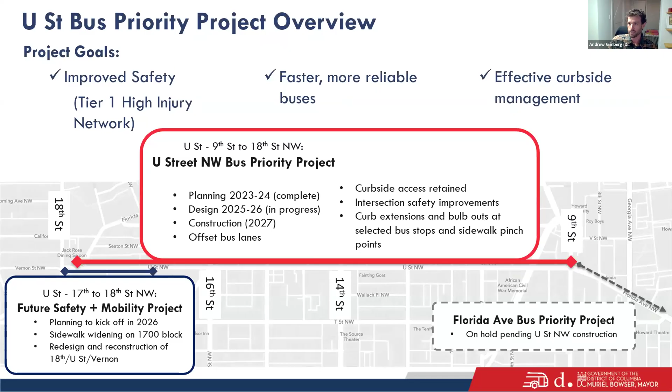So just a quick recap, we've done a lot of work on this project already. I'm not going to go through every single bullet point, these slides will be posted on our project website, most likely pretty early tomorrow. But we did a whole kickoff and needs assessment, with data collection and community engagement with all kinds of stakeholders, including this body. We went through concept development and selection, held a couple of public meetings, shared public concepts, and took a lot of feedback to refine those concepts.

ANC 1B did send a letter of support for the bus lane concept, so thank you for that engagement. We sent our concept selection letter in August of 2024. During 2025, we've had to sort out a few changes to the scope of this project, including figuring out that western end of the corridor, what we could do in this project versus what needs to be done as part of a bigger future project.

That was one of the key things we figured out regarding the scope of this project. We made a few tweaks to the overall design and have reinitiated the design work, so that's going full steam ahead and we're back on track. Right now we're issuing project updates. We're not reopening the goals of this project or the concept at large. However, of course, we're always open to hearing your thoughts and feedback.

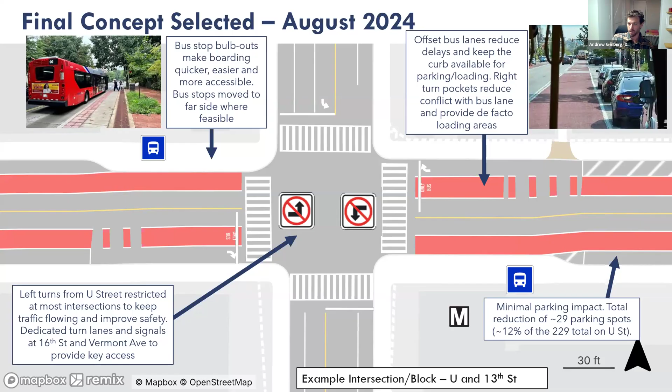A final flag: minimal parking impacts. Those numbers flagged at the bottom right are rough estimates—we'll get more precise as we move into the design phase. We do have to provide spaces for right turn pockets, a few lane shifts, and bus stop changes. Our initial tally is a slight reduction of around 29 parking spaces out of about 229, so about 12%. Those are estimates likely to change, but that's our initial estimate at the moment.

There have been a few changes to flag since we made that concept selection official. Some of it stems from action the DC Council took in the fiscal year 2025 budget. Led by Councilmember Nadeau, additional money was dedicated to this project and to DDOT to study and construct a few aspects along the corridor.

The first was sidewalk widening at the 1500 block, north side—that's the top image. It's a very narrow sidewalk pinch point, uncomfortable to walk along, and as part of this project we're going to address that. The area that's temporarily closed with curb, wheel stops, and flex posts where the slip lane was can be filled in and enclosed to make a much nicer pedestrian area, closed off with permanent materials like fresh concrete to make it nice, comfortable, and safe.

The second issue is the southbound slip lane, the diagonal lane onto New Hampshire Avenue from southbound 16th or westbound U Street. We observed a lot of high speed turning movements across that, really inhospitable to pedestrians and cyclists, and one of the more dangerous maneuvers on the corridor. So we did some initial traffic analysis to look at impacts and diversions that would result from closing it.

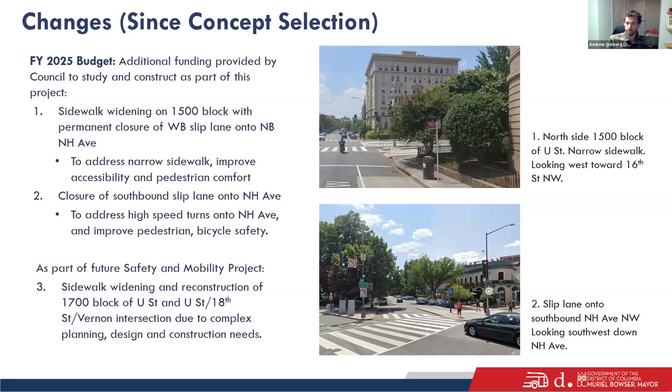In the northern part, there's a much expanded sidewalk area on that north side of the street, and this whole pedestrian area is going to be expanded and made much more comfortable.

One thing, in order to provide dedicated left turn signals and not create tons of bottleneck and delay for the buses, we are going to be eliminating the bike signal that currently allows bikes to do this diagonal movement from New Hampshire southbound. We're going to mark it, and we think this is a much safer maneuver anyway, because we noticed a lot of bikes just riding through the whole intersection diagonally.

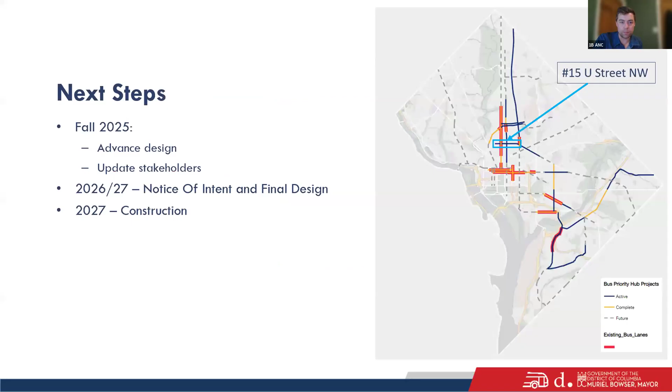Yeah, let's go back to that 16th and U slide. I also have a question about it. I'm very excited about the sidewalk widening at the pinch point on the northeast corner. I think that'll be great.

With the change to New Hampshire, will that still remain a one-way southbound street? Yes. Okay, so the only access is from U Street eastbound prior to 16th. Okay, cool. Yeah, I think people will be challenged by this idea, but I do think updating the geometry to be more like a regular intersection will have tremendous safety benefits. Crossing here is one of the worst places to cross in the corridor, so I think it's great that you guys are trying to figure that out.

Okay, Karen? Hi Andrew, I like the improvements, they're nice. I'm just curious to see exactly how closing off New Hampshire Avenue, which I frequently see used by our emergency vehicles, is going to work, especially with the fire engines that use that as a way through, and the accessibility for any of the residents that live along that street to have their emergency care.

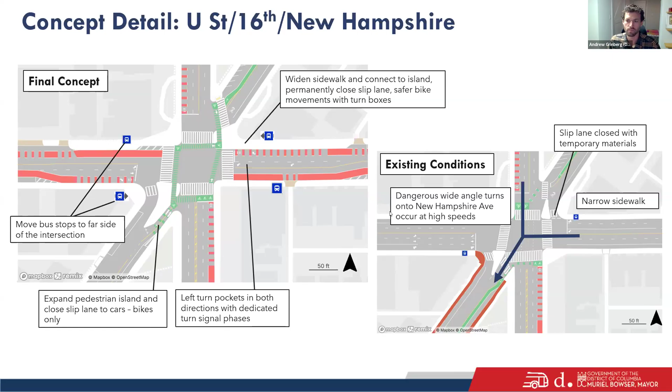Okay, good questions, everyone. So next, we're going to go to the streetery resolution. I sent this around, hopefully some people got a chance to look at it.

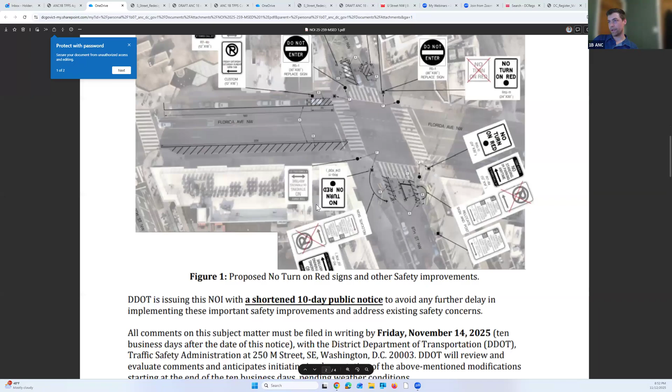This is what the treatments would look like. So they're adding additional no turn on red signs, adding some do not enter signs, adjusting the parking slightly, and adding some new pavement markings to increase sight lines and prohibit turns.

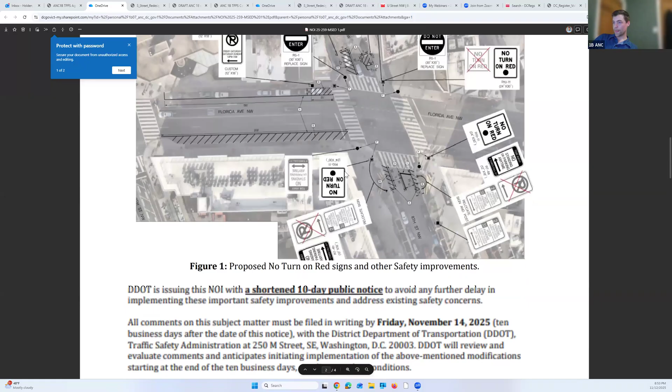This should make it easier to cross the street and for drivers to see pedestrians in the crosswalk. Because of the crash history, there's normally like a 45-day or 30-day requirement for public notice, but they issued it through a shortened 10-day public notice. I didn't feel anything in this was controversial enough to push back on the 10-day shortened notice, because they said this was identified through crash analysis and a high rate of crashes at this intersection, and 8th and Florida is a very busy pedestrian area. I didn't want to delay the implementation by requesting it to be longer.

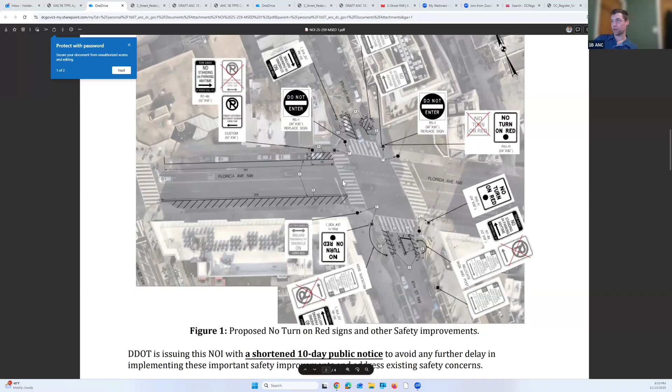So officially the full ANC is not going to vote on this, but I just wanted to mention it and see if anyone had anything they wanted to talk about. It's fine if we don't.

I was going to say that's a scary intersection, so I'm glad to have anything that makes it less scary. Yep. Okay, great. Oh, Angela.

Just super quickly, what I'm noticing happening is that some vehicle traffic will come from V Street and cross over 9th to cut through like where the Whole Foods is. And they'll make that right to come down so they don't have to make that left turn going to U Street. So I'm just flagging that it might create a bottleneck on 8th.

And there's a parking garage on the back of Atlantis, with a lot of cars trying to come out that way. So I'm wondering if we're going to have a traffic situation with more congestion because people are using that as a cut through, and if we could remedy that by maybe taking some of the parking off of U and 8th, because I think that's what's interrupting people's sight lines when they turn. Nobody wants parking removed.

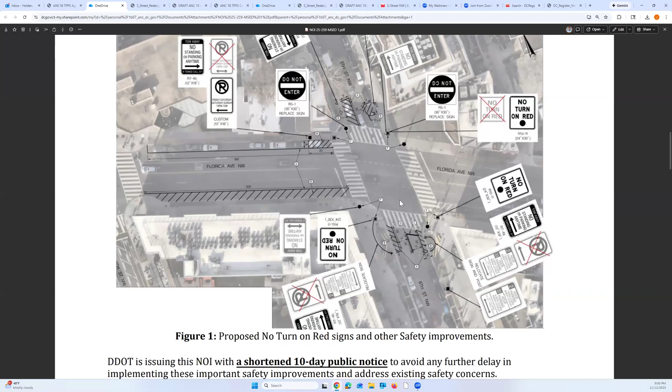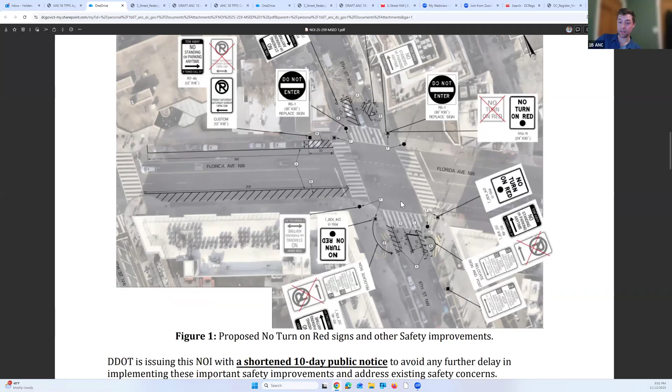So I think maybe for this one, we flag it in our minds, and then we ask maybe in a couple months after they install this, we ask for an update. Especially because there's been, we had the previous complaint and the last topic about lack of responsiveness from DDOT and the engagement team. If in the spring or early next year sometime, we invite DDOT, Keisha Anderson, or outreach folks to come back and do a readout like we did a couple months ago on different projects.

Like this would be one of the things we give them as a question. Hey, we'd like you to attend the meeting. We have some questions about spots around the neighborhood. One of them is Florida and 8th. It was that quick comment period. Since you guys have installed it, have you seen an improvement, or what's it looking like? Maybe that's what we do.

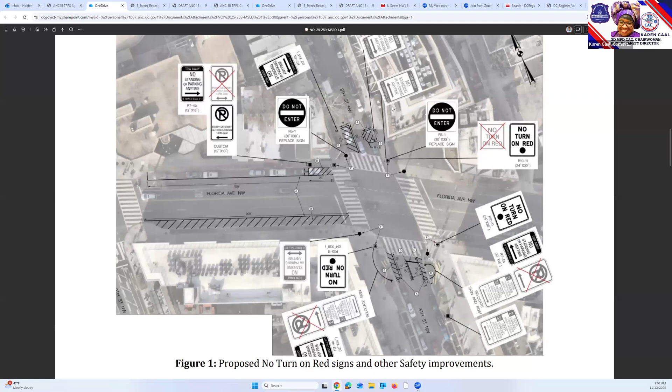Karen? I actually like that idea. I think if you give them a listing of the different things, especially if you work in their priorities with the ones that we're asking for as well, and let them know this is what we want to discuss, they will be much more in tune to want to do their actual work that they have on their plate. But also let them know that it's really important that they see these particular issues that we also have as community concerns that we want to discuss too. That's one of the ways you can rebuild that relationship that has been dissolving over time with DDOT. Okay, great, good comments everyone.

I know it's 9. I'd like to move on to the final item of the evening, and that is a return to multifamily ADA parking applications.

Karen, if it's all right with you - I think, because nobody - you sent this right as the meeting was starting, and I love it. You sent two resolutions because we talked about splitting them into multifamily reserve space applications, and then also general ADA parking in residential areas. This meeting, let's talk about the first one, and the next meeting we can talk about the second one.

Well, it's two paths, one goal. I mean, one has immediate action that would be done through DDOT, and the second one, which will take a little longer, is going to require some work with the DC City Council. I'm just asking that if we can vote to approve both of the resolutions for the full ANC consideration. And I know with your help, because you are one of those willing commissioners to work on this, that we can move this faster. I broke it down into two resolutions as was suggested in our September meetings.